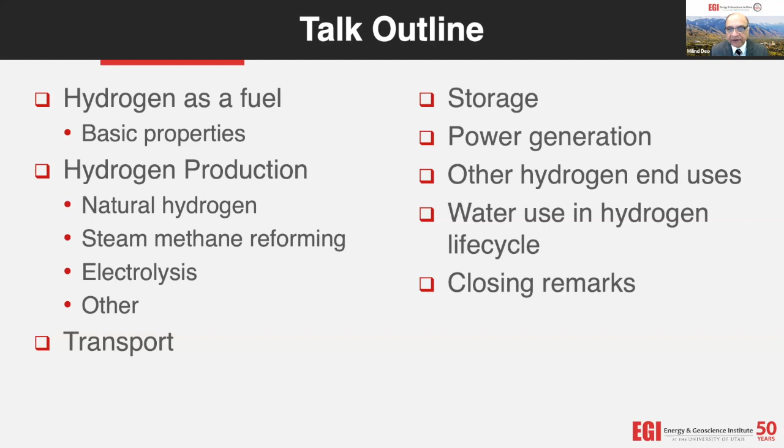Transport of hydrogen, we'll just talk about that briefly. When hydrogen is not going to be used on site, it needs to be stored. So we'll talk a little bit about storage. In a circular type of system, the generated hydrogen is used for other purposes, or also for power generation, for again creating electricity. So we'll talk about some aspects of that. Other hydrogen end uses. We just completed a study of water use in the hydrogen life cycle, because there is some concern about the use of water in hydrogen, and then we'll close with some conclusions.

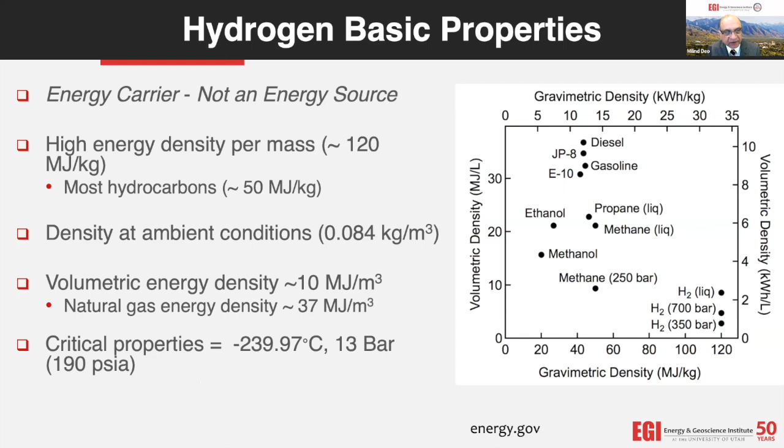There have been a lot of colors given to hydrogen depending on the source of hydrogen. Green hydrogen is hydrogen produced from electrolysis when the electricity comes from renewables, so this will be zero net carbon, or very low carbon hydrogen. Blue hydrogen is when hydrogen is produced from fossil fuels, like steam methane reforming, but CO2 is captured and stored. Gray hydrogen is when it is produced from steam methane reforming, but there is no carbon capture. There are a few other colors that even I was not aware of. So as more sources of hydrogen become apparent, we might run out of colors eventually.

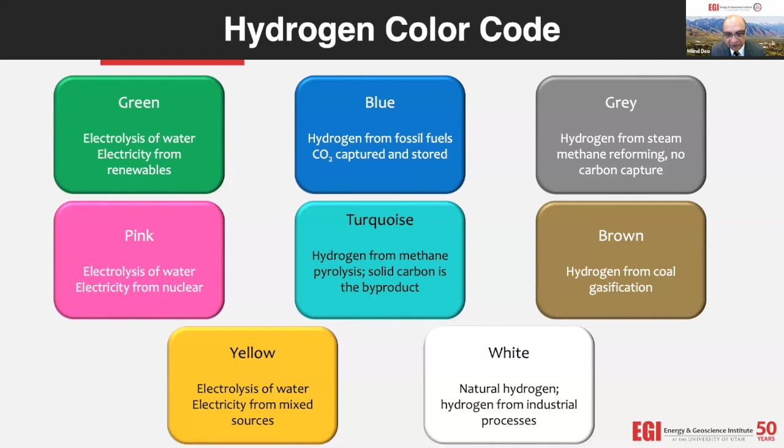Pink hydrogen is electrolysis of water when electricity comes from nuclear, turquoise is methane pyrolysis, brown is from coal gasification. Yellow is when electricity comes from various sources, which is what we currently have in the grid. And white hydrogen is natural hydrogen or from industrial sources as a byproduct. We should be aware of this because it provides some basis for the carbon footprint of the produced hydrogen, because one of the big incentives for the hydrogen economy is to have a zero carbon or very low carbon fuel.

So one contemplated hydrogen life cycle is to use renewables like wind or solar, then use electrolysis with that electricity to make hydrogen, and store it. One of the possible storages is in salt caverns, and this is the least expensive large-scale storage of hydrogen that's available.

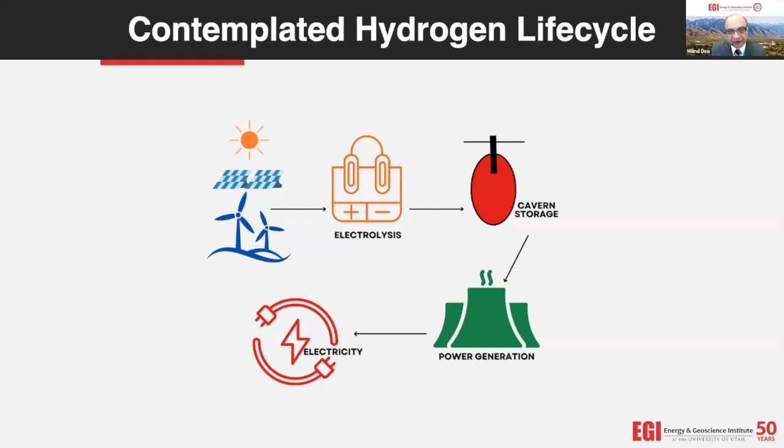And then at times that you do need electricity, you would use that for power generation and generate electricity. So this actually would stabilize the supply of renewables. So hydrogen would essentially be looked at as an energy storage material. So let's start with sources of hydrogen, or production of hydrogen.

As I mentioned to you, there has been a good bit of interest in natural hydrogen lately, and we've done a significant review of the literature in this area. And these next 3 slides are from my colleague, Dr. Eiichi Setoyama, who's working on this project.

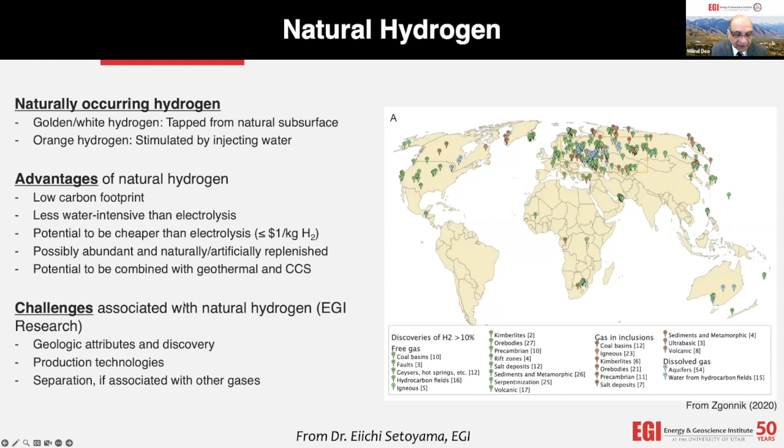So here are some of the mechanisms for the creation of hydrogen. The 3 main mechanisms that have been proposed are radiolysis, where radioactive elements react and generate hydrogen. The most common mechanism understood to be the source of hydrogen is serpentinization, which is the reaction of ferrous to ferric in the presence of water to make hydrogen, and then deep-seated hydrogen, which comes from the mantle, which is a little bit rarer.

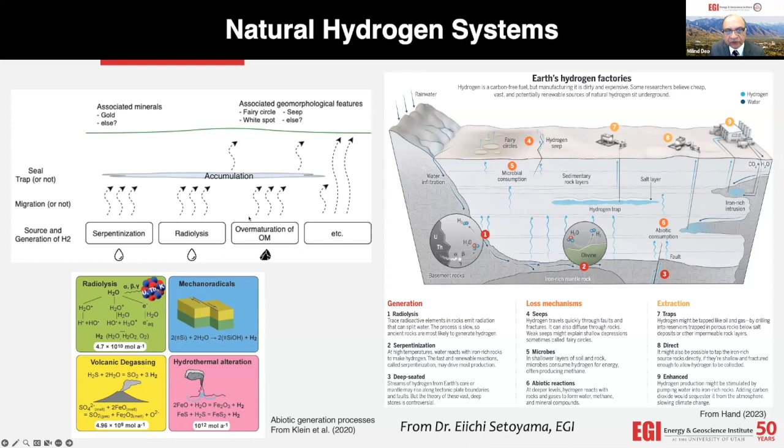And then hydrogen does have several loss mechanisms. That's one reason why it's not as commonly found as methane. And then there are the different traps that can exist for trapping hydrogen. So this schematic shows the different processes that Dr. Setoyama looked at, including over-maturation of organic matter, which is also hypothesized to be one of the mechanisms.

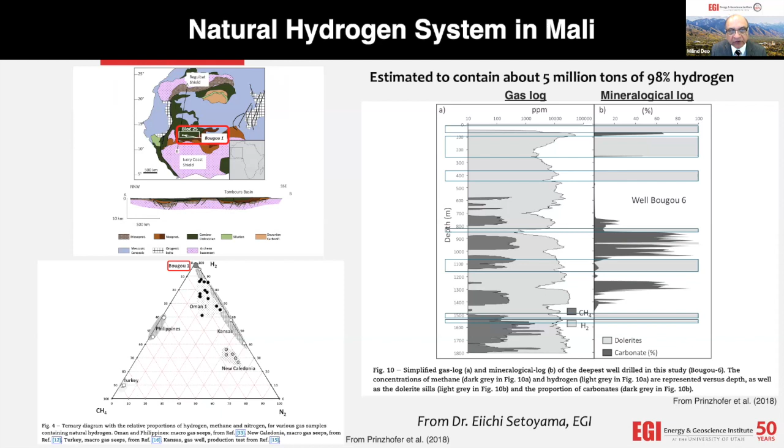This particular well is also associated with methane accumulations, but they are in different layers along this depth, indicating that the mechanism for generation is very different, and even accumulation and traps are different. And we are studying that now in detail to figure out under what conditions this would accumulate and what geologic attributes would facilitate the accumulation of hydrogen in natural systems.

So that's ongoing and is a promising area of research as we look at natural sources of hydrogen. Hydrogen production in the United States is a fairly established industry. I showed you in the slide before that this well in Mali had an estimated 5 million metric tons. The current annual production in the US, just to put that in perspective, is 10 million metric tons. Most of it is used almost on site for petroleum refining, about 70%, and then 21% for fertilizers, and other uses after that. But most of this hydrogen is produced where it is needed and consumed.

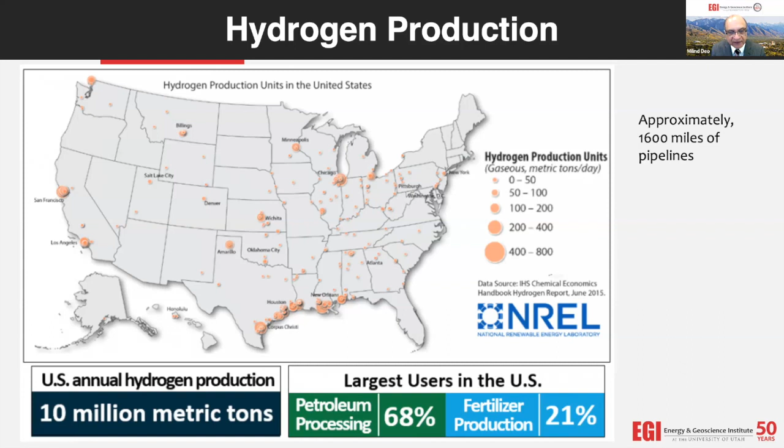But this is a fairly well-established industry, most of which is produced using steam methane reforming, which consists basically of two reactions, the reforming reactions and then the water gas shift reaction that produces hydrogen. This is a highly endothermic reaction, so it takes a good bit of energy to make hydrogen from this pathway, but it's still the most common and, as I said, the most well-established method.

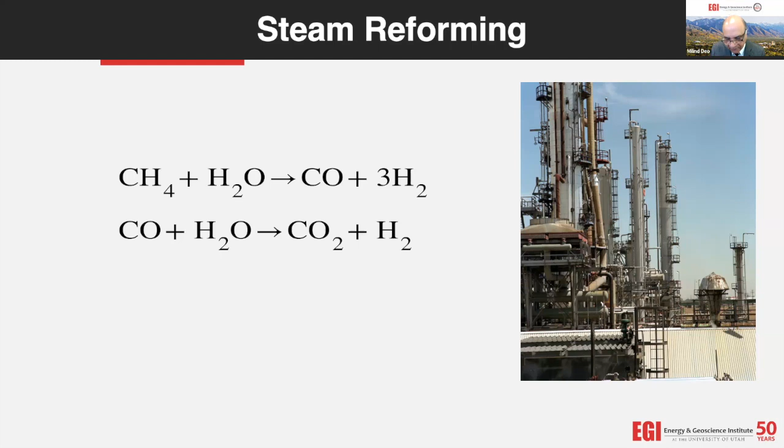And then there are some heat recovery systems. So because it's a fairly sophisticated process, the heat recovery systems are built in. The gas is cooled, goes through some separation, and then hydrogen product is recovered at this stage.

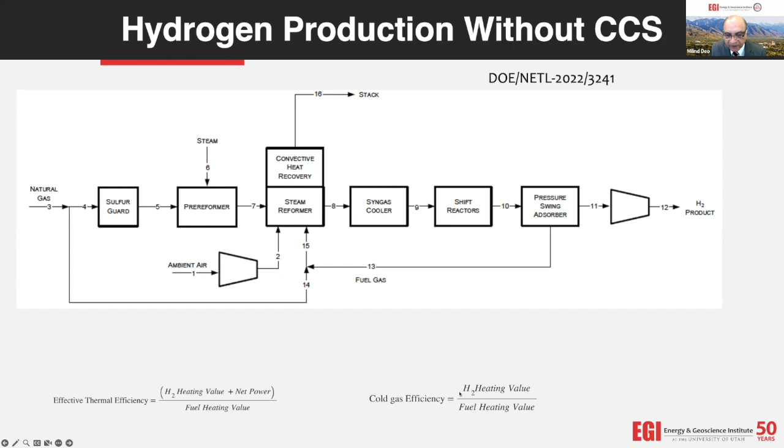I'll define two things here. The effective thermal efficiency is heating value of hydrogen plus net power that is used in making the hydrogen divided by the heating value of the fuel that is actually supplied to the process, and the cold gas efficiency is the hydrogen heating value divided by the fuel heating value.

So obviously, if hydrogen is to be produced by low carbon means, you have to capture CO2, because as you saw in the reaction, CO2 is one of the components produced during the reforming process. So it needs to be separated. So there are now established technologies for separating CO2; it goes through several steps actually, this methyldiethanolamine absorption followed by this CANSOLV unit. This I think is a commercial process. Shell, I believe, has this technology.

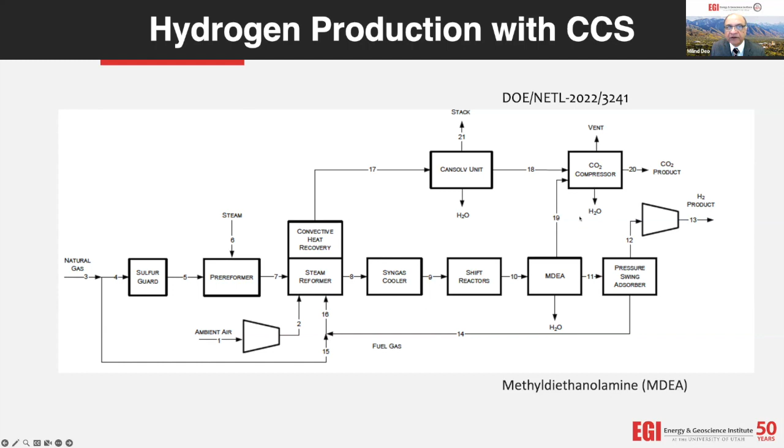And then CO2 is recovered and then compressed and then either sold as a product or stored. So this upstream process for making hydrogen is combined with this downstream process of capturing CO2 in this hydrogen production with CCS.

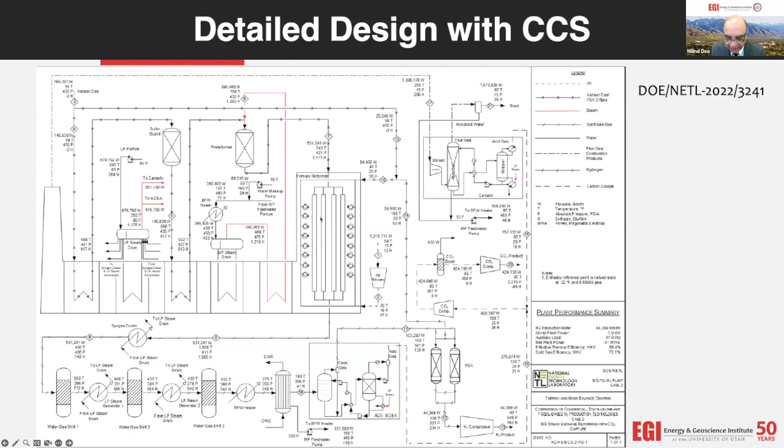As I mentioned, the processes themselves can be quite complicated, as is shown in this simulation diagram. In practice, this can even be more complicated. And you can see that there are several units that are combined. There is an extensive heat recovery unit, and then there is a stripper absorber system for recovering carbon dioxide. So that's with methane as the feedstock.

There are other feedstocks that can be used for making hydrogen as well. For coal, there is a commercial process in a couple of places around the world for using coal to make hydrogen, not as common as, of course, SMR, steam methane reforming. Biomass processes are being developed. In fact, even in our department, Professor Whitty is working on technologies for taking biomass to hydrogen. And then you can actually use a petroleum residue or waste for making hydrogen, and then the entire cycle of using that hydrogen for various means.

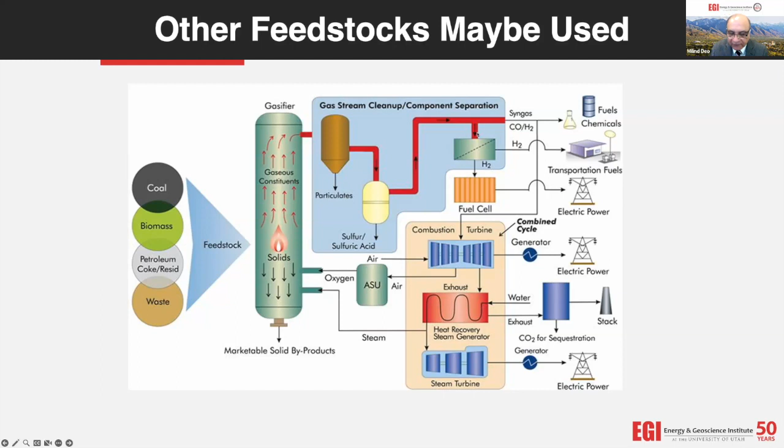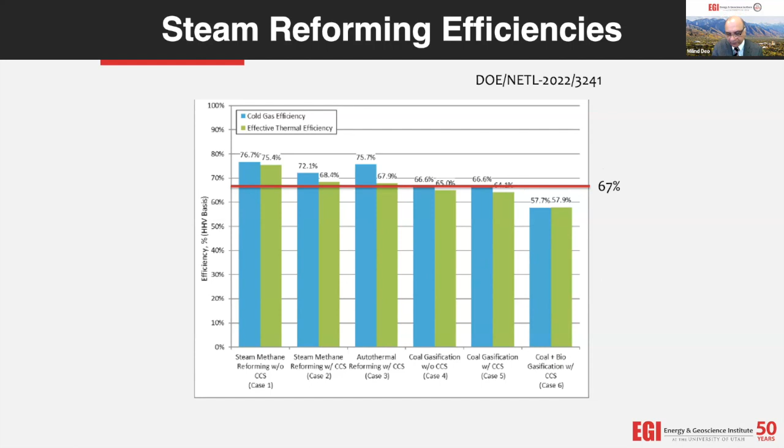And then as you go to more complex feedstocks, the efficiency drops. But generally, I think these are still slightly higher numbers than in practice. For installed capacity SMR, I would say that the efficiencies are more in the 65 to 67% range. And this is something that I have verified from several other reports on operating steam methane reforming plants.

What about costs? So as you know, there is a hydrogen earth shot that aims to make low carbon hydrogen, or hydrogen with CCS, less than $1 per kilogram in the next 10 years.

So this is again from this report. I don't think the recent cost increases in methane as well as some of the inflation costs are built into this. So this is in dollars per kilogram of hydrogen that includes transportation and storage. And it lists it as $1.06, but I would again think that it's more in the $1.60, $1.70 range, given the current cost of natural gas and other costs of energy

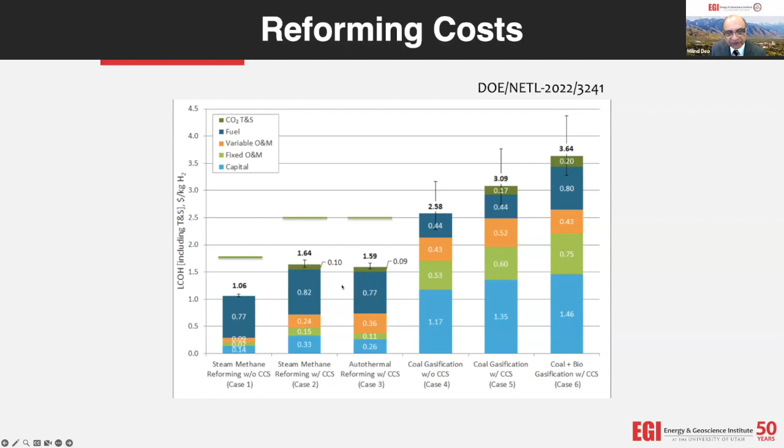in the process. But this gives you a good feel for what the costs are and how they increase as you go from the basic process to carbon capture and sequestration, the autothermal process, and then as you go to other feedstocks. Since this is an established process, there is less of a spread in this cost compared to these other processes.

There are only a few operating plants with CCS currently in the world. There is one in the US in Port Arthur, one in France, and one in Canada. And then there are a lot under development. And these have fairly significant capacities, as you can see, 200 million standard cubic feet per day. Most of these are SMR. Some of these now, the ones in development, are with autothermal.

And then the capture technology, the acid gas recovery, AGR or CO2 capture, is shown here. The ones that are operating are at around 50 to 60% CO2 capture. The ones that are in development are aimed for higher percentage CO2 capture, which of course would increase costs as well as energy requirements.

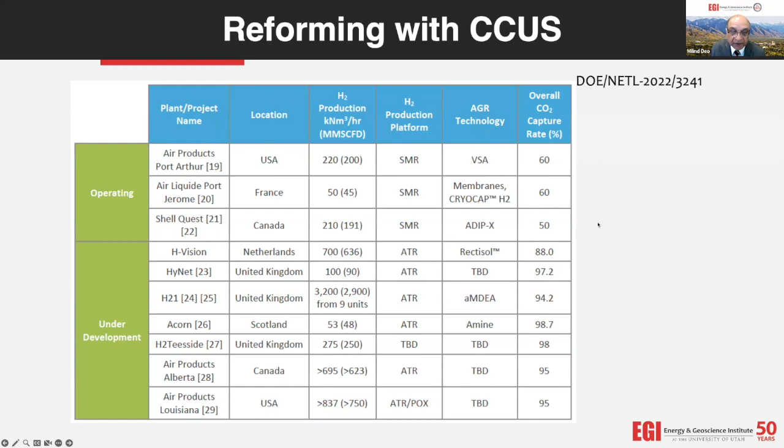Electrolysis to produce hydrogen is not as established as reforming, and this technology is still being developed. There are different types of electrolyzers. Alkaline are the most common and have been used for other applications. The polymer electrolyte membrane, PEM, process that's shown here is the next most common. And then the solid oxide high temperature process, which can be combined with nuclear power production, is also being discussed a lot for electrolysis to produce hydrogen.

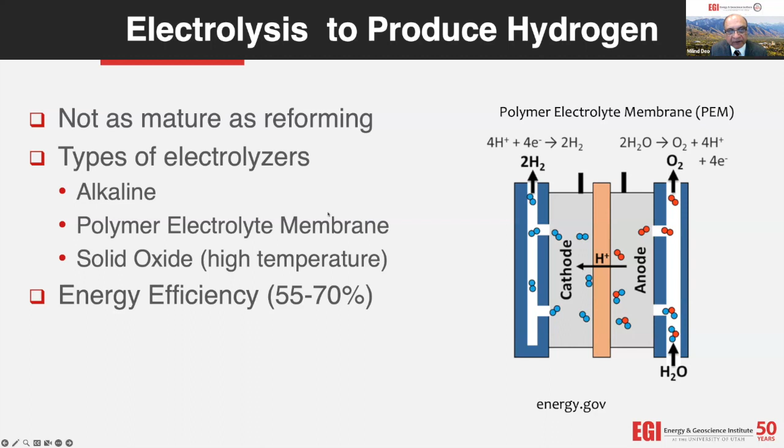But in general, the energy efficiency in most of these processes, based on what I've seen, falls in the 55 to 70% range. So this is net energy that is put into the system to the thermal energy that hydrogen is carrying out for the net amount that is produced from the process. And these still have to be scaled to the scale of the current SMR technologies. In some ways, these are modular, so you can scale them easily. That's basically the discussion, but we still have to see how, for very large scale levels of production, they match with the current existing technologies.

The costs here are a lot more variable for electrolysis. This is from the IEA, International Energy Agency, a fairly recent report as well. And as you can see, the spread depends on the type of electricity and where it comes from. But it's generally higher than reforming, more in the $2 to $3 per kilogram range. And then in Europe, because the energy costs are a lot higher, the costs of producing hydrogen are higher as well.

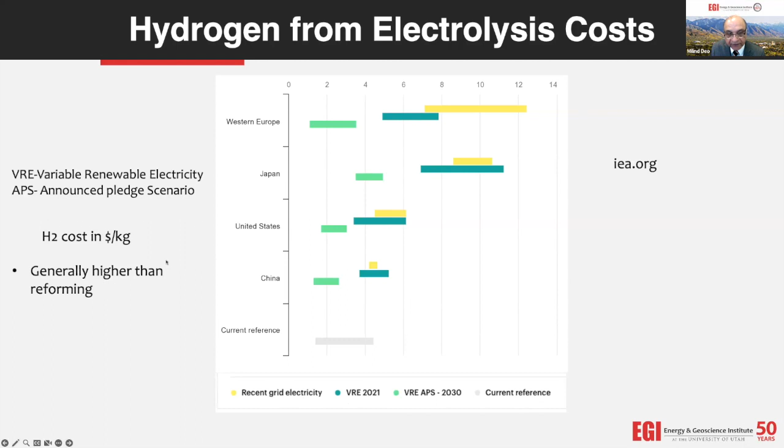Okay, so that's about how hydrogen is produced. It needs to be pipelined to either the storage site or for end-use purposes. And currently there are 1,600 miles of pipelines, mostly on the Gulf Coast, because the concentration of production facilities was in that region.

Mixed hydrogen, so with natural gas transport, is really moving quickly to large scale commercialization. And concentrations in these range from 1% to 30% in demonstrations and deployments. They are not increased to higher concentrations, of course, because the production of hydrogen is somewhat limited, and the challenges of transportation because of embrittlement of the steel pipe that it may be transported in. You have to be a lot more cognizant of leak control because it is a much smaller molecule than methane. And then hydrogen compression is another challenge that has to be considered, highly energy intensive.

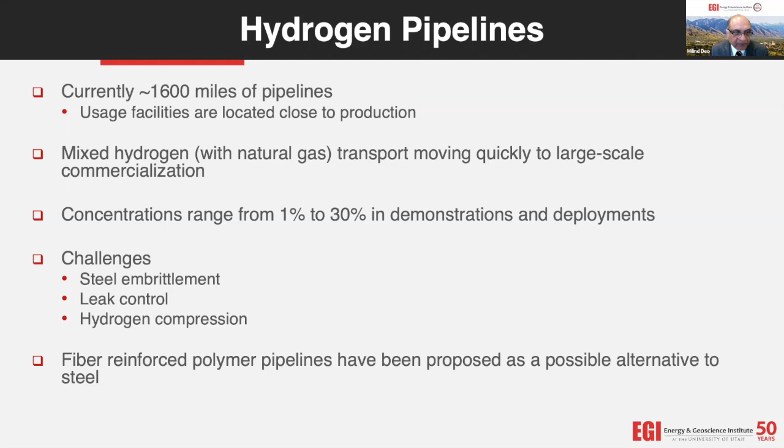And then when it is not used immediately, hydrogen must be stored. So unless used at the production site, hydrogen must be stored. Large-scale surface storage continues to be challenging. There are several new technologies that are being developed, but these are again for more smaller end-use purposes as compressed gas or liquefied gas. You see a large cylinder here with liquefied hydrogen in a commercial facility.

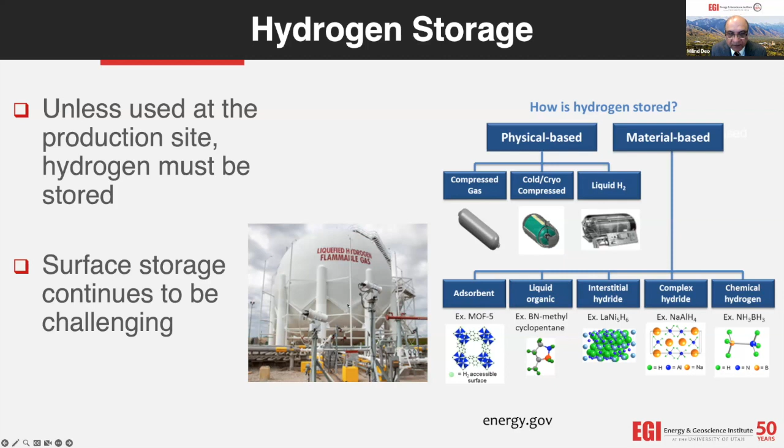And then there are several technologies, adsorbent, liquid organic, these different types of materials that would then hold larger amounts of hydrogen per cubic meter of storage or per kilogram of the material that is being used. The more common commercial technology for storing hydrogen is the subsurface storage of hydrogen, like underground storage of hydrocarbons in salt caverns.

For example, the SPR or the Strategic Petroleum Reserve, some of which are shown here, most are on the Gulf Coast here in Louisiana and Texas, is very common. So petroleum products are stored here, crude oil is stored as crude oil. There is a facility here in Delta, Utah, that has 2 salt caverns that store light petroleum products. And currently they are thinking about using similar storage for hydrogen.

And hydrogen storage in salt caverns is less common than hydrocarbon storage, but is a proven technology. And I show you several places around the world where large amounts of hydrogen are stored. So the storage can range from 1,000 metric tons to 20,000 metric tons, a fairly large amount of storage, because the salt caverns are massive. They typically are 100 to 300 feet in diameter and 1,000 to 3,000 feet high.

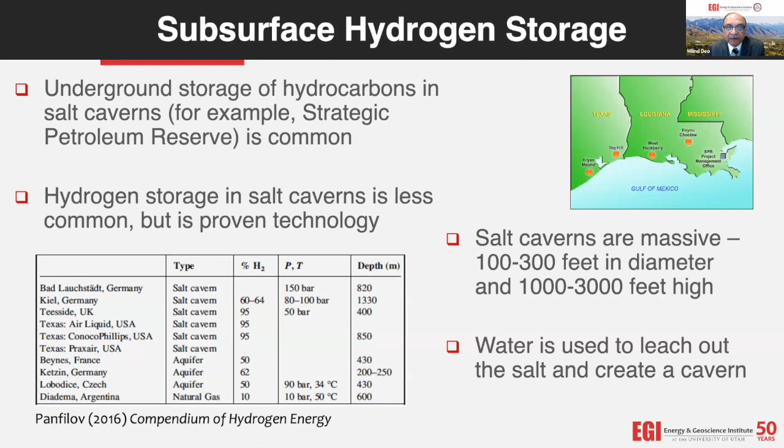And again, the only thing is that geographically and geologically, these are not as widespread, right? So we'll run out of salt cavern storage fairly quickly if the hydrogen economy does come into being. And so we'll have to think about other types of subsurface storage possibilities for hydrogen. And there are many in that regard.

And then once it is stored, it is used in power generation. It's kind of a central proposed use for stored hydrogen. But then there are lots of other uses, fuel cells in hydrogen vehicles, for making synthetic fuel. So you can combine hydrogen back with CO2 to make methanol or some other fuels. So for example, if you take hydrogen from biomass and then combine it with CO2, you essentially are creating a circular process there.

It needs to be understood, though, that every conversion step, no matter how we envision it, will require energy. So there are going to be efficiency losses at every stage that we need to consider. Anyway, so then there is ammonia, also becoming a fairly significant part of our discussion now, even as a storage medium for hydrogen, refining metals and others.

And this particular sector, at least in my judgment, is seeing transformative growth right now. There are a lot of incentives for converting current high energy use devices and systems to using hydrogen. So this is seeing big growth right now, and then the supply will have to keep up with that growth.

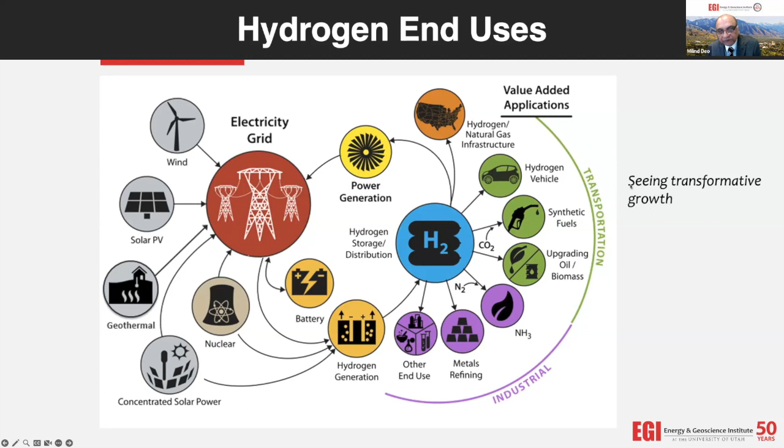So what about hydrogen power generation? This is, as I said, one of the big end uses that is being considered. Right now, there are not very many large-scale power generation facilities, so lots are in development. As I mentioned, there is one in Delta, Utah, where we are going to see in just the next few years about 250 megawatt generation by a mixture of hydrogen and natural gas. There is a plant in Japan that uses a mixture; it's a 20 megawatt small power plant.

The power plants also have thermal efficiencies, right? So now you have made hydrogen from whatever source you made it from. And if you make electricity from it, it's going to have a thermal efficiency of about 60%, very similar to natural gas. It has potential to go higher, but right now, the current data indicates that it will be in the 60% range. So from a thermal efficiency point of view, the round trip efficiency for power generation would be essentially a combination of these efficiencies en route to making power from hydrogen, and it's going to be 30% or less, maybe in the 20 to 30% range.

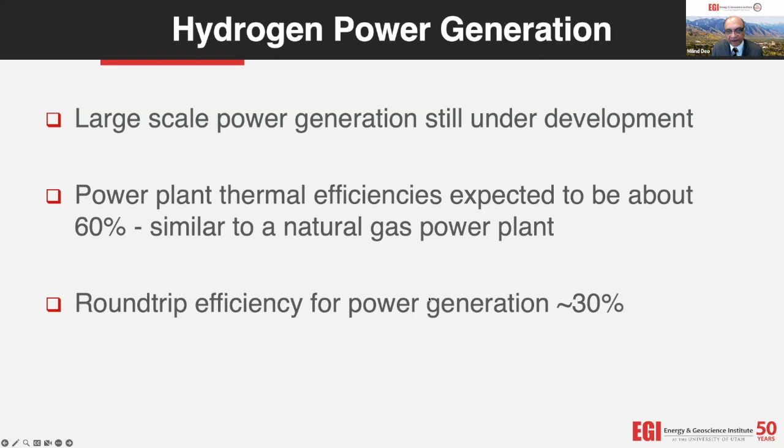So that is something that, again, we need to understand, because energy does have lots of uses. And if you decide to make hydrogen from energy and then power from it, this is what we will end up doing from an energy perspective. It might still be cost effective depending on what the cost structure is and what the incentives are, but from an energy point of view, that's what we may be looking at.

There has also been a significant debate about water use over the life cycle of this particular contemplated use for hydrogen generation, electrolysis, storage, power generation back to electricity. And in this, we have a fairly detailed report on that, and we are happy to pass this on to anybody who is interested. So this is water consumption, gallons per megawatt hour, at the different cycles of this process.

So operation is where you are essentially combusting hydrogen, and this is where most of the water requirement is, where you're cooling your systems to accommodate the turbines and so on. So this accounts for most of the water use. If the fuel that is used for generating the primary electricity is renewable, if it is wind or solar, or something similar, then you have a water footprint, which we'll probably have to think more about, especially in the West here, but also worldwide, of about 400 or so gallons per megawatt hour.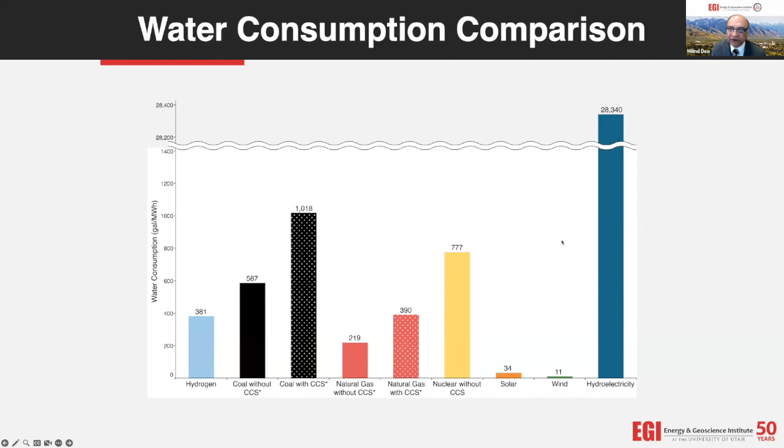So at EGI, we are looking at several aspects of hydrogen, mostly from a subsurface perspective. We have large geologic data systems offshore as well as onshore, and we're making use of this to figure out the geological attributes for natural hydrogen accumulation worldwide. So that atlas is being created as we speak. And then, as I said, we are going to run out of salt caverns if this continues to grow. And then we are also looking at hydrogen storage, again, making use of our extensive geologic knowledge and database.

We do have research ongoing in renewables. We are home to Utah FORGE. And so we're looking at energy integration and efficiencies to make hydrogen from various sources, and then looking at optimizing processes for water use and other purposes. So these are all ongoing things, including separation of CO2 for the various processes and storing it, because we have a very large CO2 storage group here at EGI as well.

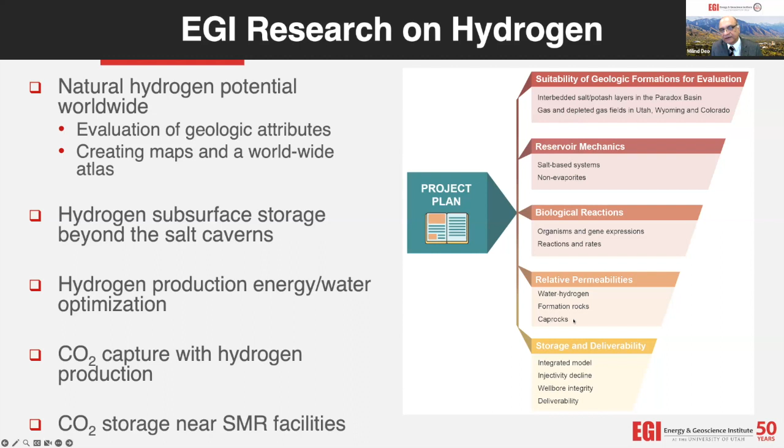So just looking at it specifically, we are looking at natural hydrogen potential worldwide, evaluation of geological attributes and creating maps and a worldwide atlas. And hydrogen subsurface storage beyond salt caverns, as I mentioned. Hydrogen production from a water energy optimization perspective, CO2 capture when hydrogen is produced, and CO2 storage near SMR facilities is something our storage teams are working on extensively. And so for the subsurface storage beyond salt caverns, here are some of the things that we are looking at, and we would be happy to talk to you on that.

In my home department, there are other faculty who are working on hydrogen research as well. I mentioned Professor Whitty, who has a significant research effort in biomass to hydrogen. With him, Professor Nigra works on catalysis. Professor Gao works on electrolysis and developing better electrolysis methods and combining it with, for example, desalination and other considerations. So this is another big effort that is moving forward. And then there is some hydrogen combustion research in our department as well as in mechanical engineering in the college.